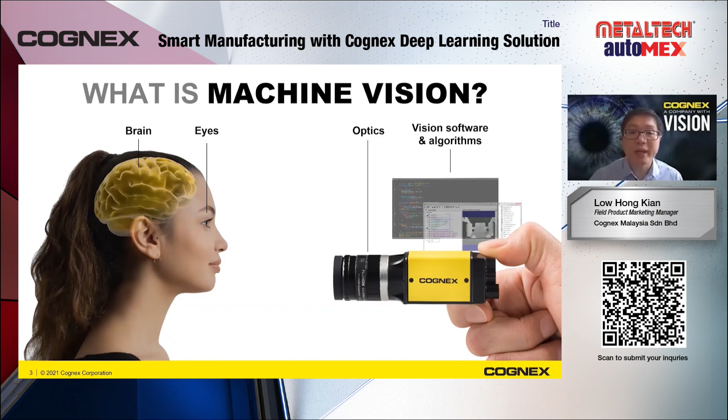So you have heard about machine vision. Let's talk a little bit about where those products are used. The answer is just about anywhere. Vision allows you to monitor and manage your production line to make sure it is done correctly. This helps you to reduce cost and error in your manufacturing process.

When we look at smart manufacturing, it is the 4th industry revolution. First revolution, we started to change from human energy to other power sources like water and steam. Second revolution, we changed to electric energy to increase the volume or yield in mass production. Third generation, we use robots, conveyors, and motors to improve the speed. We call this automation. These three revolutions focus more about human physical ability.

Smart manufacturing equals Industrial 4.0. So Industrial 4.0 focuses on connectivity and cognitive ability. We try to collect more data, but most importantly, we use the data.

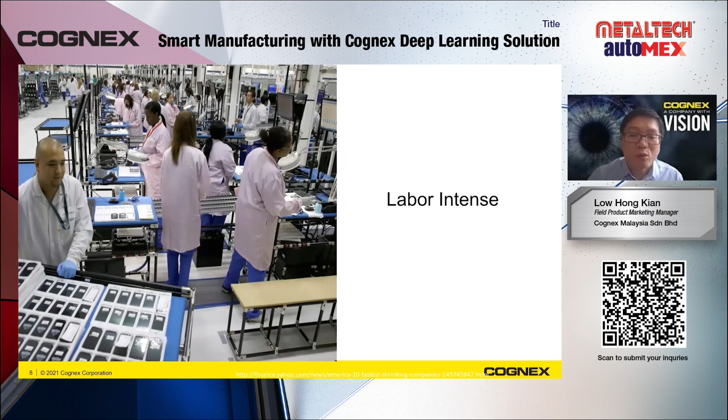And this is an example I heard. I think this is the best story to talk about the conversion. So let's hear what they say.

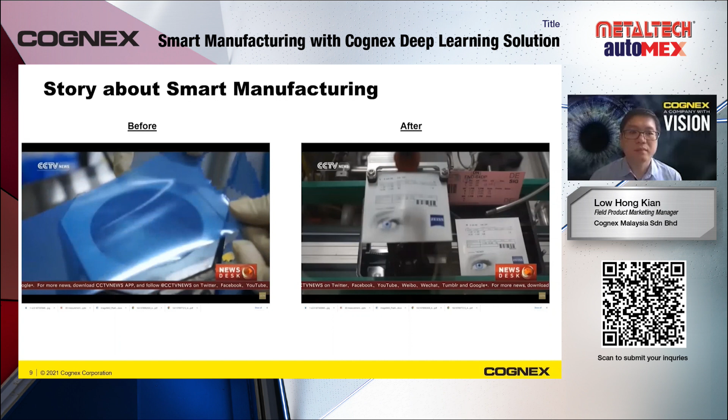This is a factory producing glass lenses for the German brand Carl Zeiss. 7 out of 10 lenses made here will go to Europe. 4 years ago, the manager discovered this Chinese plant had lost its biggest competitive edge, low cost of labor. In 2012, the Zeiss Group informed us that labor in China was twice as expensive as in Mexico and 4 times that in India. We were very surprised at this huge gap and started to think of how to improve productivity. Then Zeiss made the change.

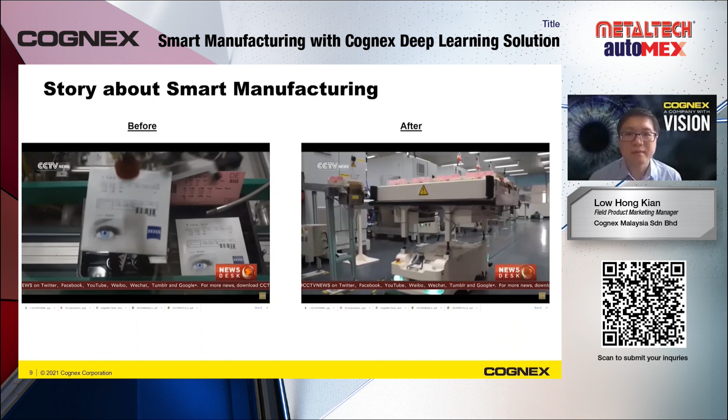Let's continue to hear what the result is. The factory introduced new automatic machines and techniques called freeform to replace humans in manufacturing. Now the machines can take care of most of the major steps, from pasting protection films, cutting shapes, polishing glass, and packaging.

Wow, this is an awesome result. I think Zeiss feels grateful because the change started earlier, and COVID-19 I don't think impacted them so much.

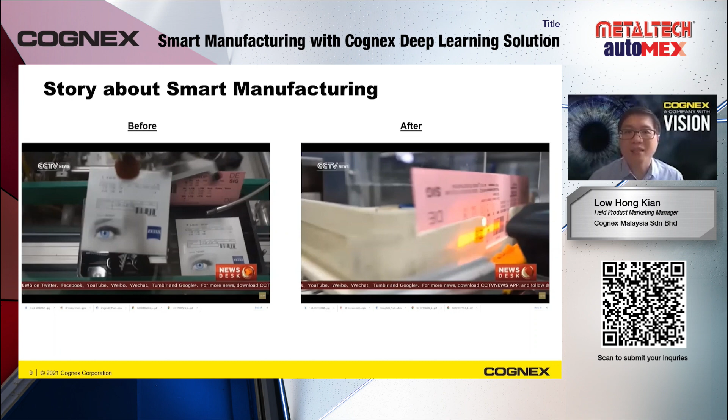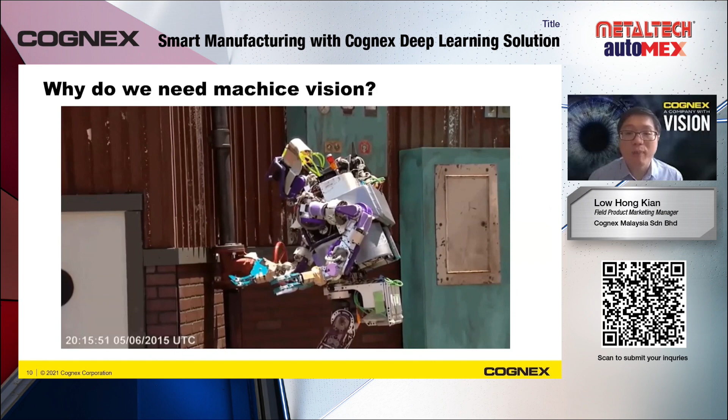So in automation, machine vision works the same as the human eye. In this video, you can find this robot trying to open the door, but it failed. Why? The motion is 100% right, but it did not do it at the right location, because the robot just doesn't have machine vision installed, so it cannot know.

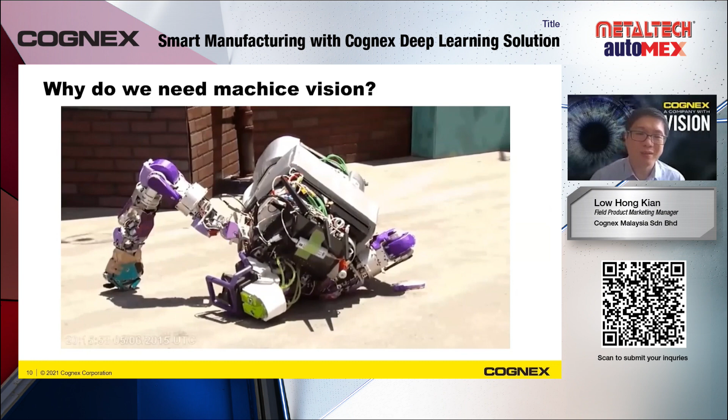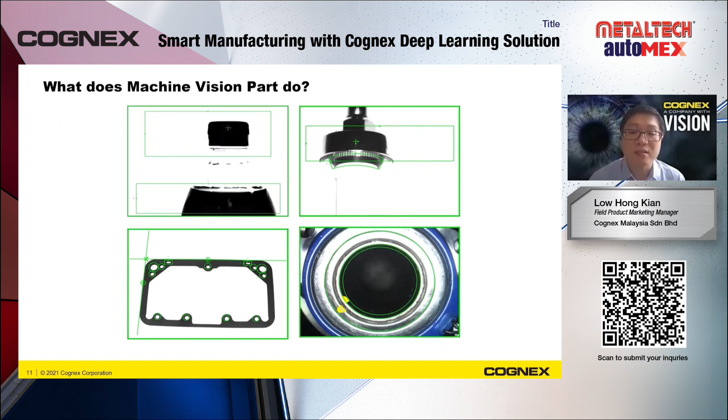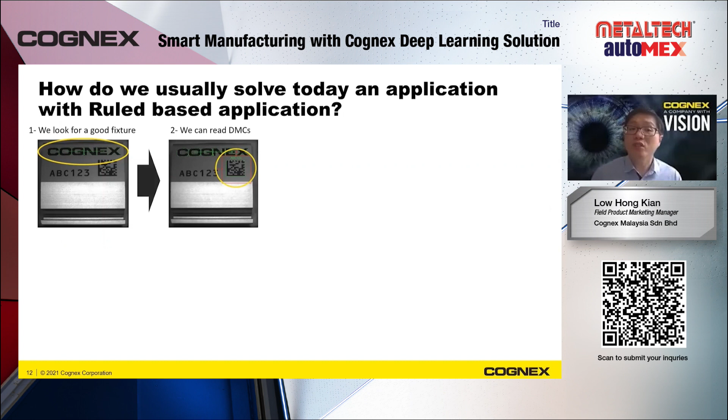So how do we solve the normal vision application? Usually we have to inspect a part by looking for the good fixture first. Second, apply vision tools like barcode reading tools to read the data matrix code, OCR tools to read the print or text, and finally use measurement tools to measure the width of the parts.

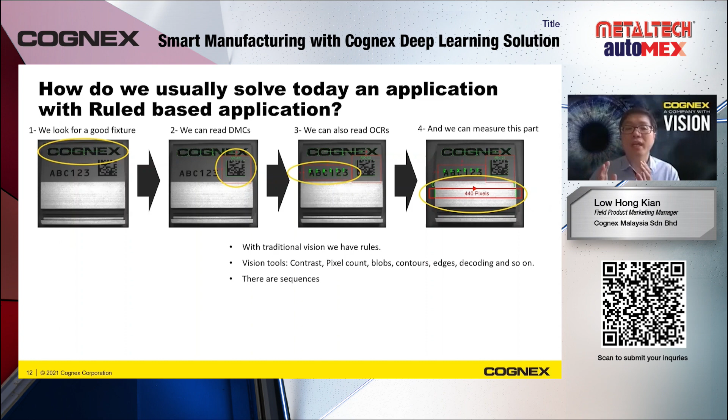You must understand, traditional tools are rule-based systems. We must use different kinds of vision tools combined together, like contrast tools, pixel count, blobs, contour, edge, decoding, and so on. You need to follow the sequence in this way.

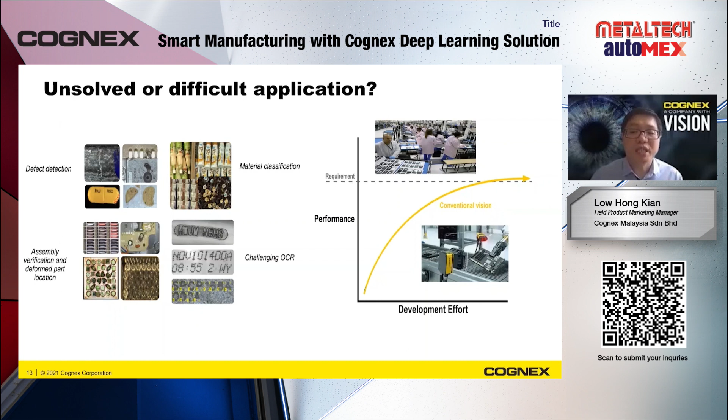Conventional vision systems have limitations solving four kinds of applications: defect detections, material classification, assembly check, and challenging OCR. Conventional vision systems started to face performance issues, so usually we still need human inspectors. That is the biggest challenge and barrier to going smart manufacturing.

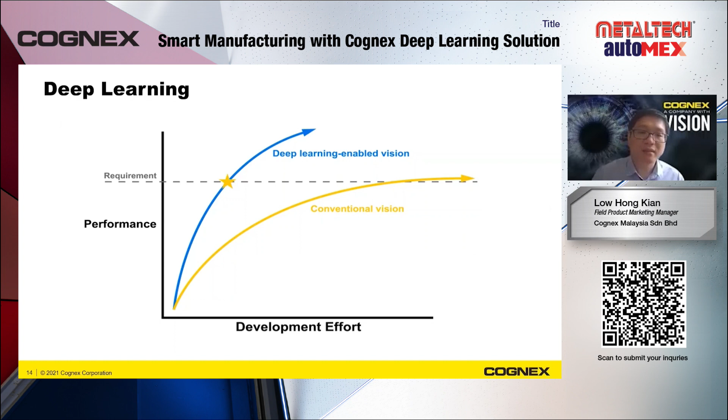And finally, we have some answer for you. Deep learning is the answer, helping us to cover more applications with better performance. But how does deep learning work?

This approach is different than traditional machine vision. This approach is mimicking the brain. We teach by example. So if I want to let deep learning recognize a house, at first I will just provide different images of houses. Deep learning, like a small little girl, will try to generalize and conceptualize. So this is how deep learning works, and it will know what is a house.

Deep learning is a core part of AI technologies, so it focuses more on cognitive ability like humans. With deep learning, we have to learn from a large amount of data and allow machine vision to adapt and continuously improve the program. So in short, it is human-like, it can do self-learning, and most importantly, it's very powerful.

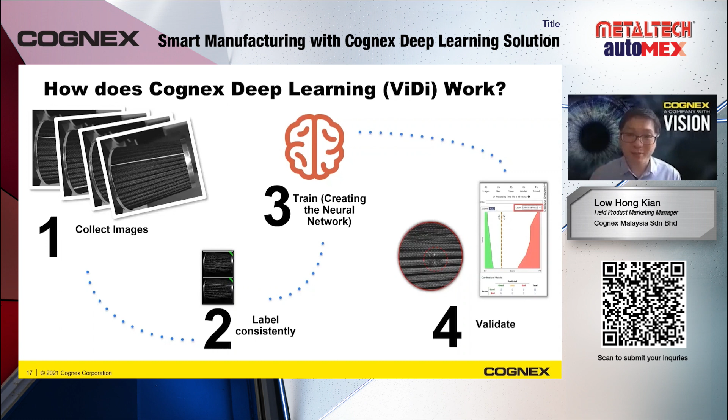So with 3.0, we can help convert some routine work. But coming to deep learning, we can provide cognitive abilities or predictability in the production flow. This aligns with the direction of Industry 4.0. So deep learning falls into this part.

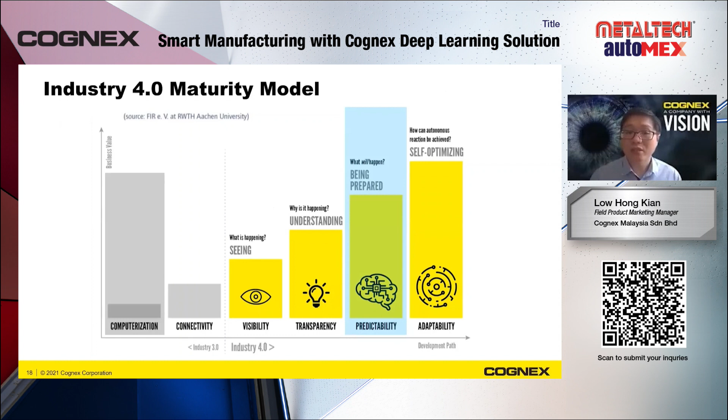We can check the structures, check the fuel filters and seatbelts. And coming to kitting, we can do spark plug tray or door handle checking, assembly check to make sure the right product is at the right position.

This is good for seat trim or covers, wire position, carpet and headliners. And we can do OCR to read the VIN plates or the texture on motor parts, to read the print on them, and to do welding inspection.

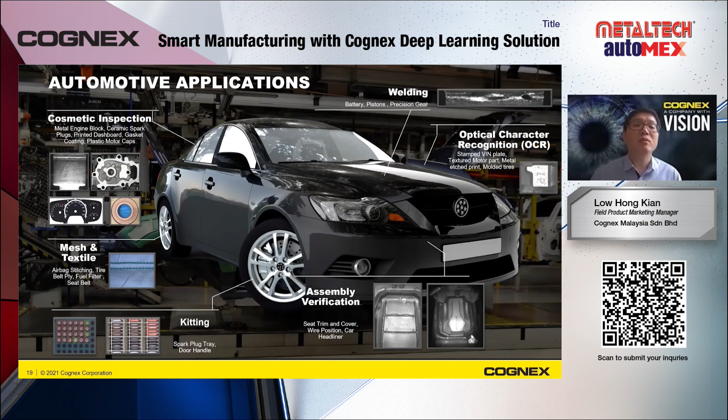So these are the common deep learning applications in automotive. Coming to electronics, normally we focus on those high-value products, so smartphones are the most common application we normally do.

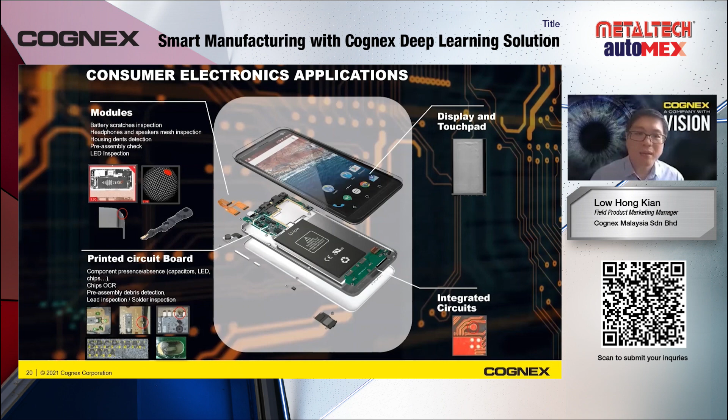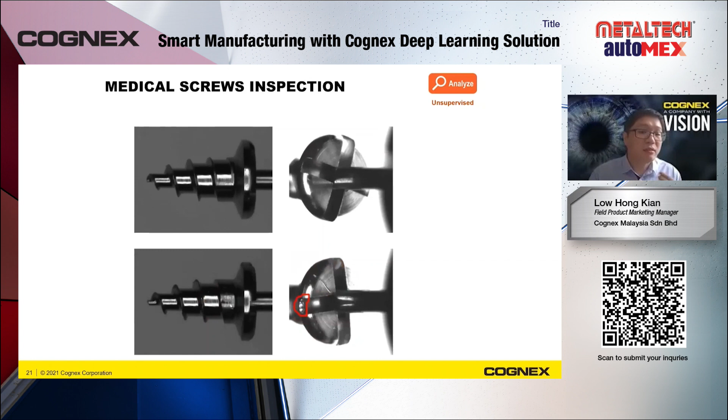Here's an example to give you more understanding. I want to share with you the first application: medical screw inspections. At the top side, there are good screws, and we need to train with some images—let's say I capture 100 to 200 images. Then when it comes to production, if you try to detect any anomaly on the samples, the bottom side shows it detects some dent or scratches on the screws.

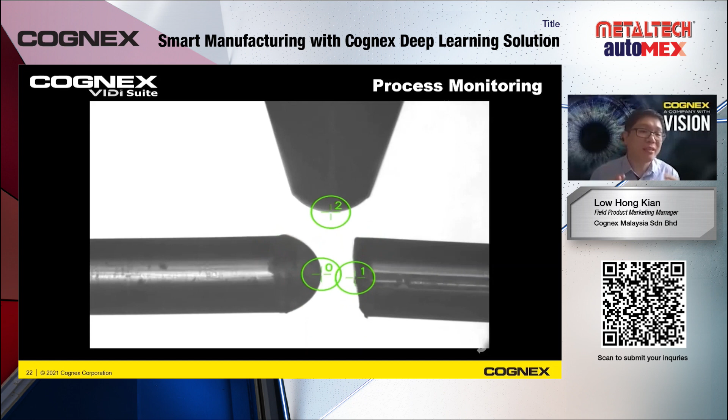The solder can never be consistent because it's a liquid, and only deep learning allows us to really detect this process, or check some application's ingredients. When we rotate or stir the mixtures, we can see good conditions versus problems, like when foreign material falls into the mixture. Using deep learning, it detects even a small piece of debris or foreign material and tells the system something is wrong.

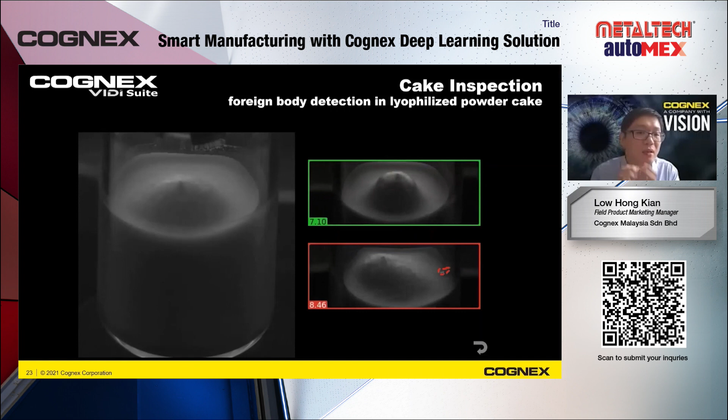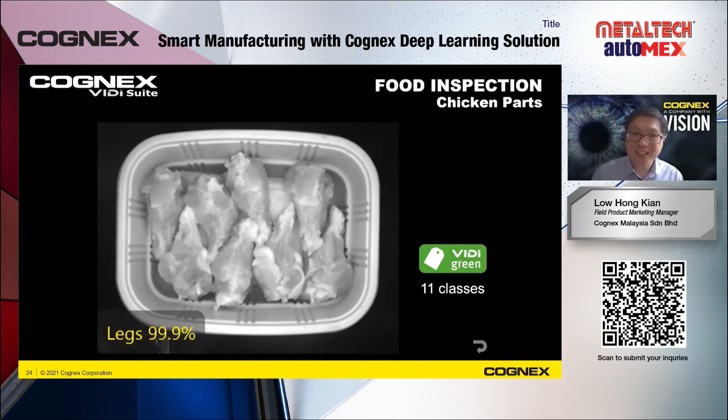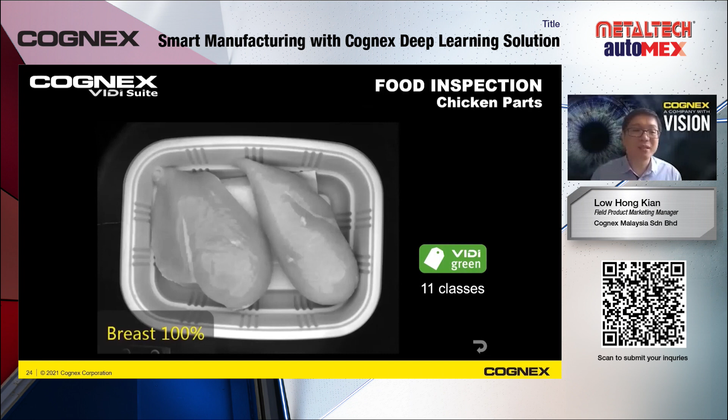Or we can do classification for food. This is a good example. We can train on different parts of chickens. The deep learning system can tell you this, even though pictures aren't identical. Most importantly, when we train another sample, the system can tell whether this is a chicken breast, chicken wing, or another type. This is interesting.

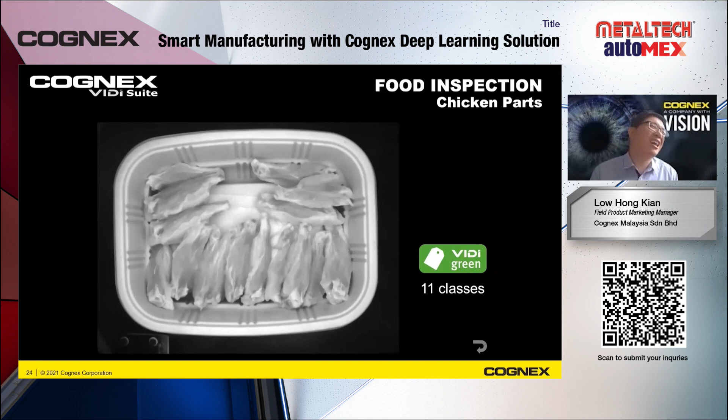To make this work, here are the basic deep learning architecture requirements. First, we need an algorithm. Second, we need GPUs for processing power. And last but not least, we need a lot of images to train it.

In deep learning, the general model we use is based on convolutional neural networks. It consists of thousands of classes, and each class is a layer of the neural network. To train it, we need to train 1,000 classes with a lot of images - it can be millions to make it stable.

So what makes Cognex Deep Learning unique? It's optimized for machine vision, specifically for real-world factory environments. We can train on a limited set of data, like 100 to 200 images, where others require millions. We can also train on a single PC with GPUs, while others might need a supercomputer or mainframe to make it work.

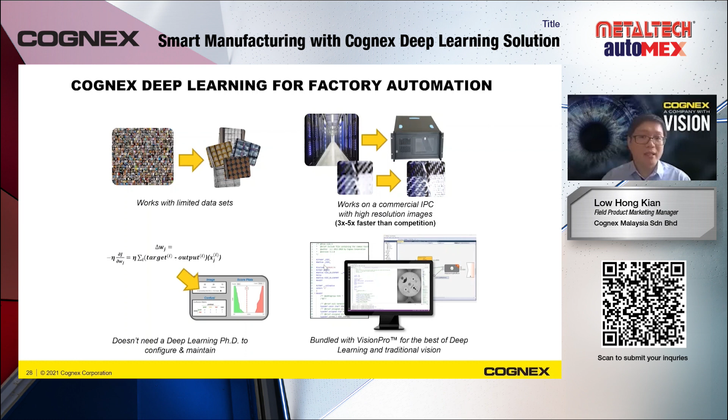With our tools, you don't need a PhD to configure and manage it because there are a lot of graphical interfaces. As long as you can use Microsoft Excel or Word, you can handle it without issues. It's also bundled with VisionPro traditional machine vision software to solve different kinds of applications. I'd say this is the most powerful software you can find in the market.

We try to put this kind of system in our smart cameras, so let's take a look. I have a video to introduce this camera - we call it the D900. The In-Sight D900 is a standalone vision system running In-Sight ViDi software, designed specifically to run deep learning applications.

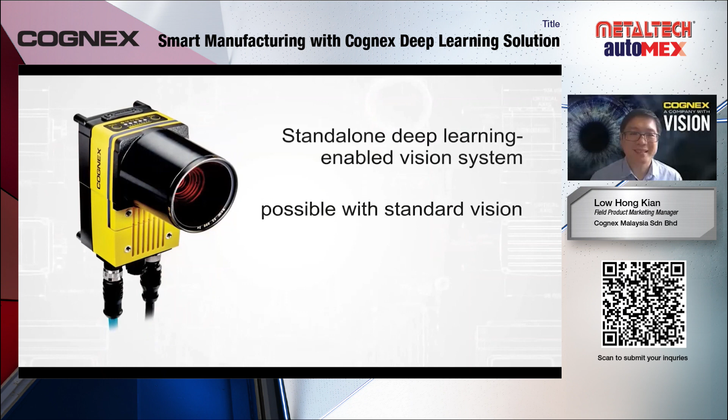This embedded solution easily solves applications too difficult to program with traditional rule-based machine vision tools, and provides reliable, fast, and consistent results not possible with human inspection.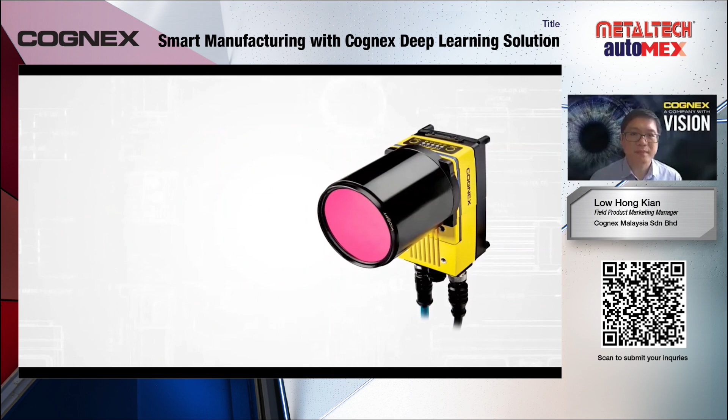Applications are deployed on the Insight D900 smart camera without the need for a PC. Using the familiar and easy-to-use Insight spreadsheet interface, it helps simplify application development and factory integration, making deep learning technology accessible to non-programmers.

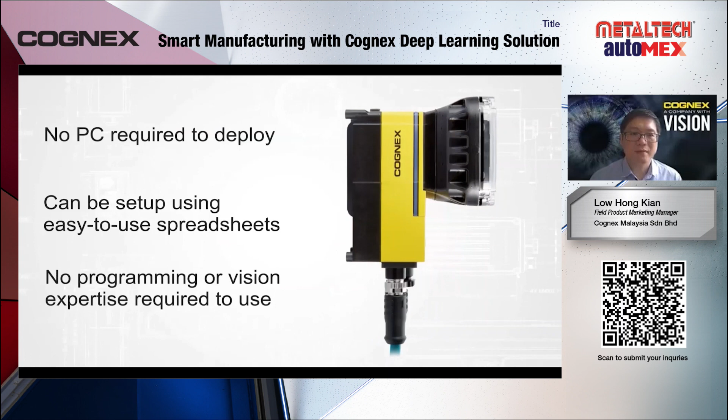The Insight D900 has both 2.3 and 5 megapixel options, allowing you to choose the right resolution for your application. Advanced image processing with HDR+ creates a more uniform image on a single capture, ensuring every detail is visible, even under challenging lighting conditions.

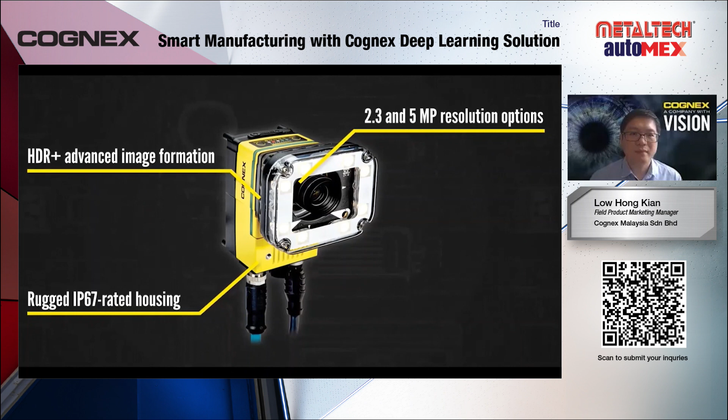The Insight D900 is rugged, with an IP67 rated housing, able to withstand even the harshest factory environments. Field-changeable lighting and optics provide users with ultimate flexibility to customize the system for their application.

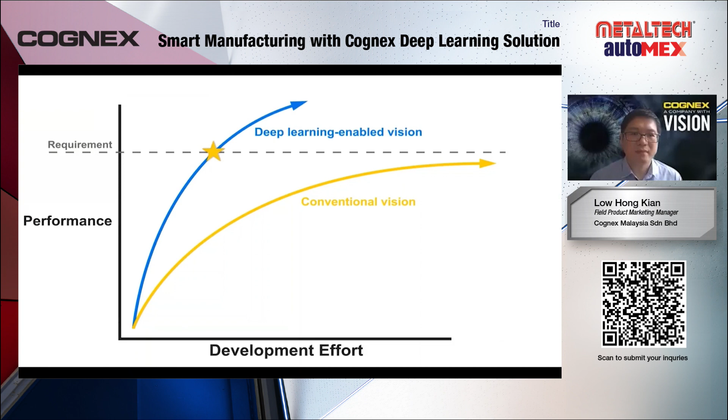Example-based deep learning allows users to automate inspections not feasible with standard rule-based machine vision. Applications like defect detection can be programmed using only good images, drastically reducing the setup time needed to get the system up and running. And because the training models use multiple images, ViDi can handle variations in the targets, as well as changes in lighting and camera perspective.

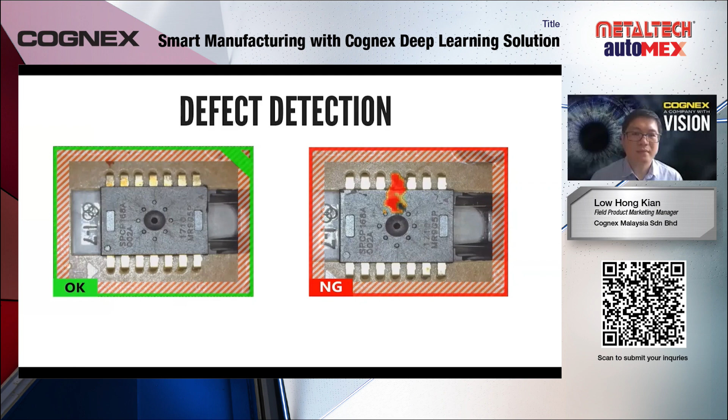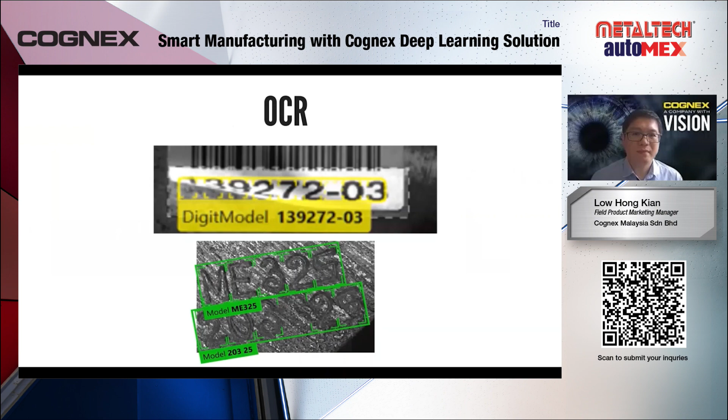OCR, especially on hard-to-read and obstructed codes, can be easily done with deep learning. Insight ViDi is preloaded with a font library right out of the box, and can be further refined on the factory floor.

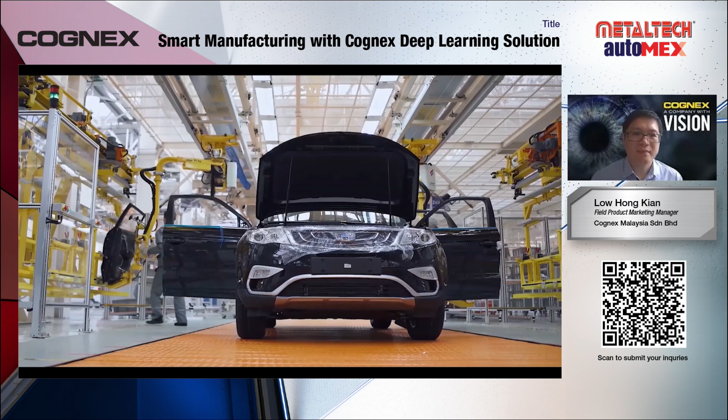Manual inspection was once the only practical method for assembly verification. Parts can have too much variation, and frequent production line changes make it difficult to reprogram a vision system quickly.

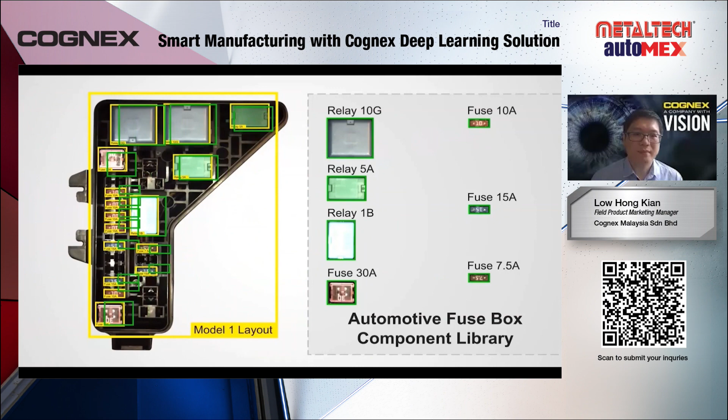But because ViDi's neural network uses multiple images to create a working model for each component, it can handle part variation with ease. Plus, operators can use ViDi to create a component library and use that to create custom layouts right on the factory floor, making new line configurations quick and easy to do.

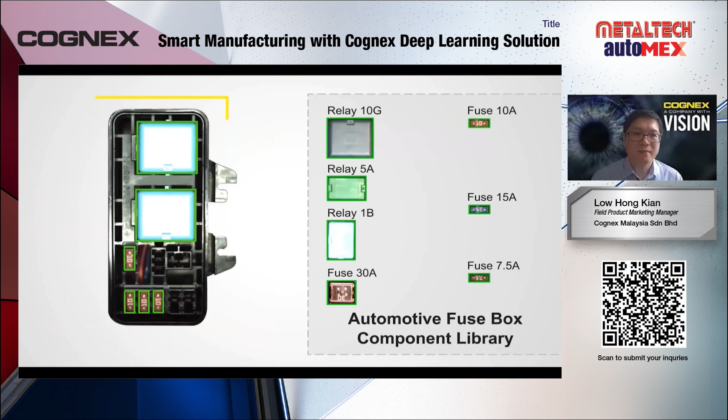Deep learning is changing what's possible in factory automation. The Cognex In-Sight D900 is making deep learning-enabled machine vision more accessible and easier to implement than ever before, enabling users to further improve quality, efficiency, and throughput in their facilities.

Wow, this is a very good introduction to our deep learning system. I believe I have some experience with customers coming to deep learning applications. They told me they always need to spend a lot of time to source the camera to get the system running - easily 1 to 2 years.

In Cognex, we would like to make this process faster. That's why I would say deep learning with smart cameras - this should be the right answer. Today I'm not in Metaltech, so I cannot show the live demo, so I would like to share 2 videos.

So the first one is about the plate and tube identifications. In this application, we try to use deep learning to recognize whether any tubes are empty. The blue one is good, then the gray one shows there's no cap.

Then we try to change to another one, which is in a different color. We can detect those empty tubes without changing the job file. This is all in one.

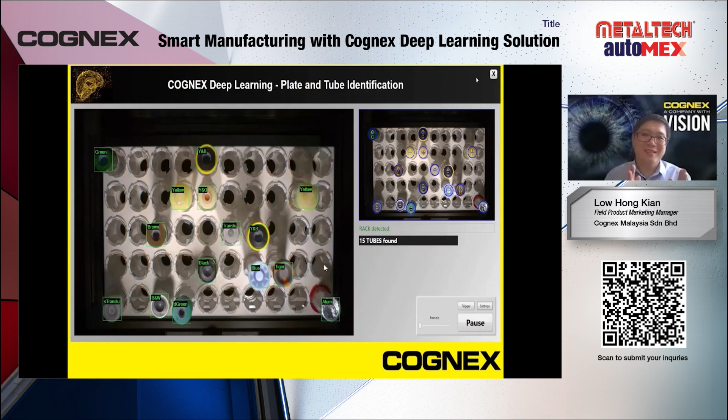And the next one is a live demo for the challenging OCR applications. You can see how my colleague demos this - narrowing down the ROI for just the characters.

And with the transparency, I can start doing interesting things like bending it and changing the scaling, changing the shear and the aspect ratio of the characters to prove that the ViDi read tool is very robust against those changes.

And just to prove that that's not black magic, what I can do is cover up some of these characters to show what happens when a tool can't read characters and they're totally just not visible to the camera.

And for the subtle part, we can start messing with the background, right? So let me just increase my exposure real quick. We'll want to start the demo around 0.4 probably.

And I can introduce this carbon fiber business card and show that as the background changes pretty drastically, we still get good read performance. I'm just going to throw a different transparency into there to show a different one.

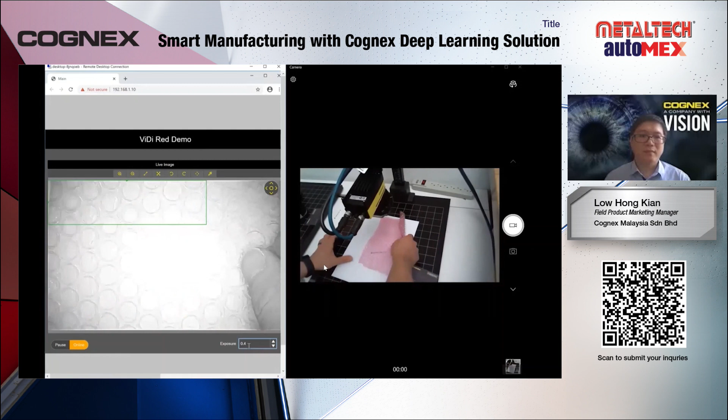So that's pretty neat. I can do some other interesting things like throw in some bubble wrap, make the background kind of challenging. Let's do that.

Actually, let me just decrease the exposure now and make that more interesting. So, in fact, I can read through the bubble wrap, so you can see how well the ViDi read tool performs when there's a ton of variation on the characters.

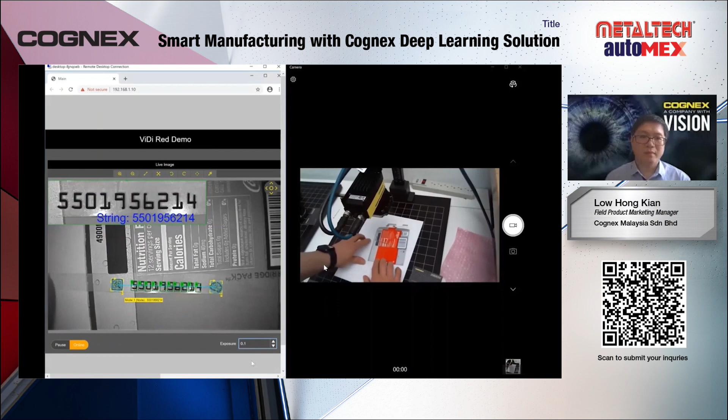Some other things I can do, introduce a really varied background like this one. And again, the ViDi read tool can perform pretty well on that.

So then if the customer is interested in seeing how that was set up, we can go into ViDi Suite and show them another interesting detail.

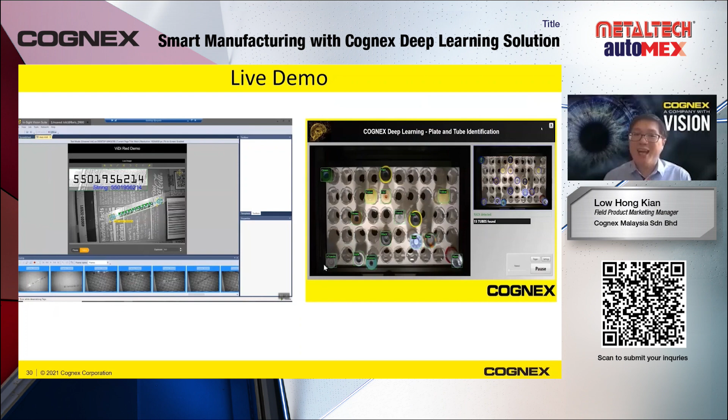Yeah, that's all for my live demo. From here, you can find D900 is a killer product for this kind of application, challenging OCR or presence checks. After the live demo, I would like to share a 10 minute video about the defects detection tutorial. Then you will know how to train a system.

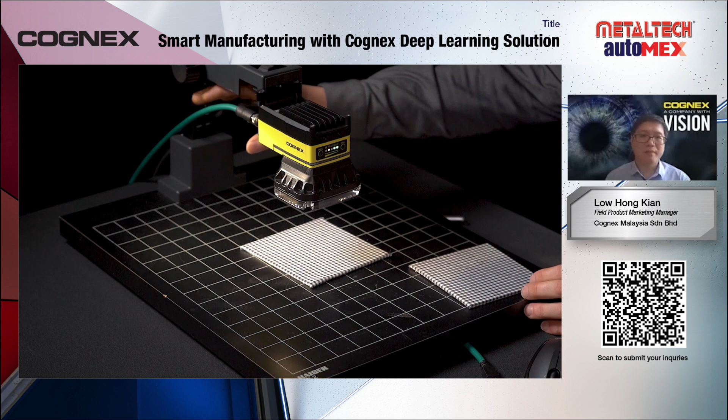Today, I'm going to take you through setting up the ViDi Detect tool. In terms of my setup here, I have the D900 and it's hooked up to 24 volt power and the Ethernet cable is hooked right up to my computer. My computer is GPU enabled, which allows me to train the deep learning tools. And the other thing I have here is a USB dongle, which is what has our security licenses on it.

In the application we're going to tackle today, we have a textile tile. This is what the good textile tile looks like, and here's what some defects look like. The objective of the application is to use the ViDi Detect tool to pick up these defects. So with that, I'm just going to jump right into it.

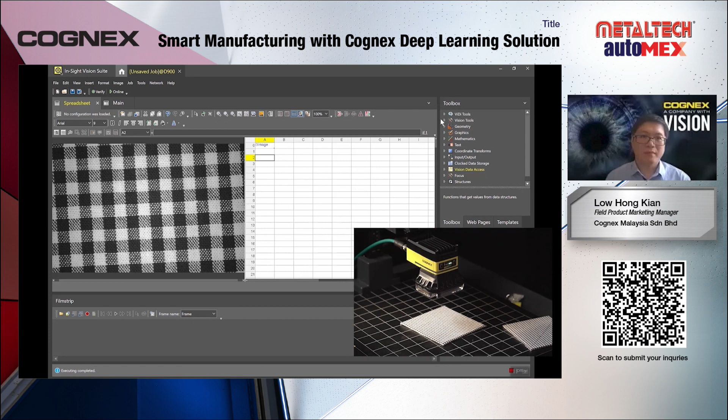The first thing I'm going to do is put my good part under the camera, and this camera's already been focused and all the image formation is set up. So all I have to do is give it a couple triggers. We can put it in a live mode and show what the textile looks like.

But the first thing I want to do is collect images of both my good and bad parts. So I'm going to use the film strip down here. I'm going to click this record button, and with that, every time I trigger, I'll get a new image in my film strip. I'm just going to go through that process for maybe 10 or 20 images of good parts.

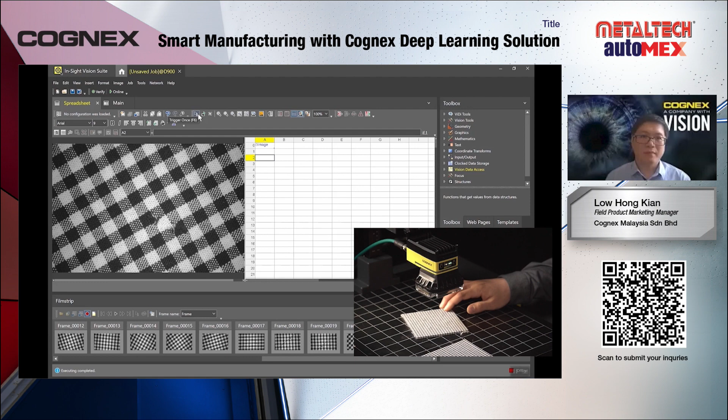You'll notice that I'm rotating with every image, because in this mat application, basically the textile pattern can appear in any orientation. Once I have 15 or 20 images of that, I'll also want to capture some images of my defects. Here you can see what a defect looks like. I'll do the same thing here, capturing a couple different defect types, including some of the small ones. Now I have a good representation of what good and bad look like in my application.

The next thing I'll want to do in this film strip is just to append some descriptors to my images. So I'm going to select this first one, scroll all the way to my last good image, which is right here, and use the Shift key and click, and that'll select those images.

If I right click, I can rename selected frames, and I can prepend a string. So I'm going to call these good, because this is all my good images, and you can see that that file name was added. I'll do the same for my bads - select all my bad images, right click, rename selected frames, and prepend the word bad here. This will be useful here in a second when we get to the Vidi tool.

So now I'm good with my images. The next thing I want to do is drop in a Vidi tool into the spreadsheet. That's as easy as going over to the toolbox here, selecting Vidi detect, dragging it over to an empty cell in the spreadsheet. And just like that, we can open up the Vidi editor.

The first thing I want to do before that, though, is to set the region. Just like all the other tools in In-Sight Explorer, the Vidi detect tool has a property sheet where you can change some settings, and I'll set my region. This is my inspection region - I'll set it to be most of the image, focusing on the middle. Once I have that set, I can hit that green checkbox, and now I'm ready to go into the Vidi editor.

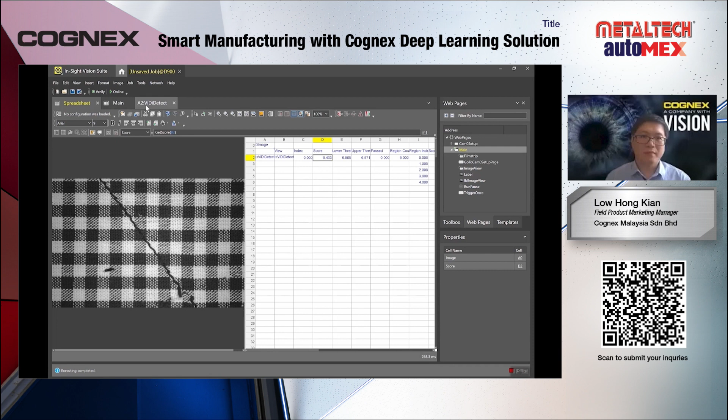Back in the spreadsheet, let's say I wanted to publish the score - this is my ViDi score for the probability or confidence of there being a defect in the image. If I right click and publish, I'll get a score here, and it'll also publish in my tags. Now if I go back to my main web page, let's pull up the tag browser. I go to view tags, and there's my tag browser.

I can search this for score, and it's going to be in here under my inspection task in the spreadsheet, score. All I have to do now is drag that onto my web HMI, and now I can get data basically published to my web HMI really easily.

Let's do that with one more item. Let's say I want to enable the user to change the graphics of the ViDi tool. I can go into this property sheet here, grab this whole show property, and put it in my spreadsheet. Then I can right click and publish that, and it's going to be by default called show. I go back to my web HMI, and now I can search my tags for show.

In a similar way, I drag and drop it into wherever I want it on my web HMI. Let's put it there for now. The last thing I want to do - this web HMI comes with a live film strip, and I need to assign a watch cell to that. That's pretty simple. I'll go over to my pass getter from the ViDi tool, right click on that, and select watch cell. I'm going to set that as my watch cell.

With that, I'm going to go ahead and put my camera online and see how it's doing. Now my camera's online. You can see that score updating. Right now I don't have any graphics shown. I can pause this film strip and review the images.

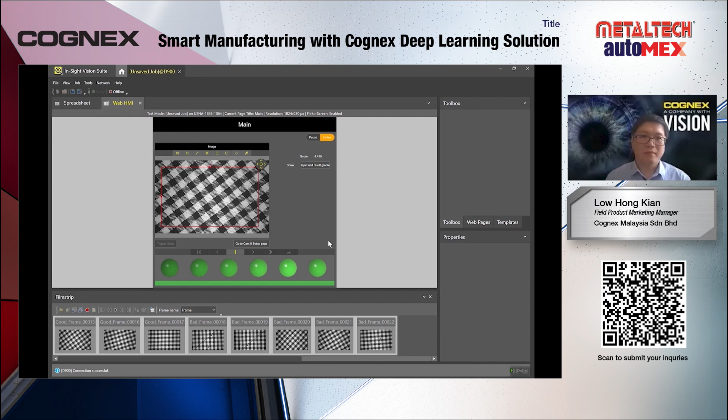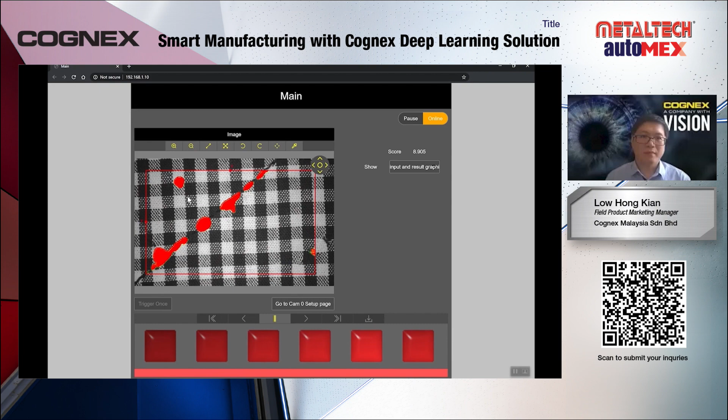The other thing I can do, I can pull this up. Since this is a web HMI, I can pull it up in a web browser. To do that, I can just go back to the shell of In-Sight Vision Suite and click this Open HMI button. And what this is going to do is pull up my default browser automatically with the right IP address, and we'll see the same web HMI that we set up before. So here's this, and just for good measure, we can throw this in here and show how it's highlighting defects.

Okay, so just to recap on our demonstration of the Vidi Detect tool, the workflow steps that we did: First, we collected images, and then we imported those into the Vidi editor where we labeled them for Vidi so that Vidi knows what's good and bad. We set some tool parameters, and we trained the tool and reviewed the results to make sure that Vidi can separate the good from the bad. Once we knew that our Vidi tool was working, we went back into the spreadsheet and used the insert getters function to get all the results data back into the spreadsheet.

Once that data is there, we can do some things in the web HMI with that data, like control the film strip or publish the score. From here, a user could spend more time with the web HMI and customize it to whatever the need is in the application. Another thing that you could consider doing is setting up the communications, whether that's to the PLC or to discrete I/O. Thanks for watching.

In my last slide, I would like to share with you what Cognex can help with in smart factories. So I tried to put one example in F&B, so hopefully everybody will like it.

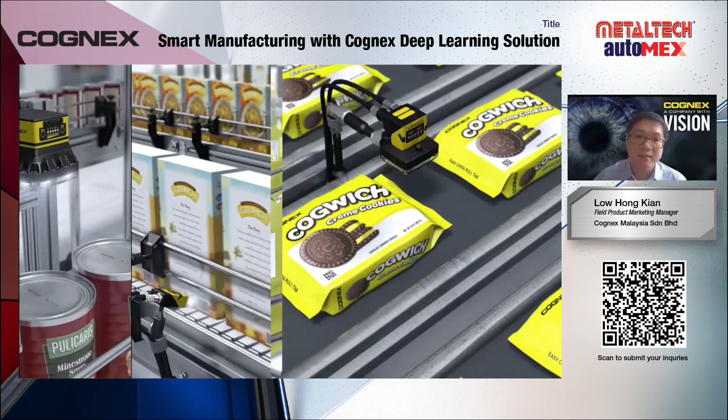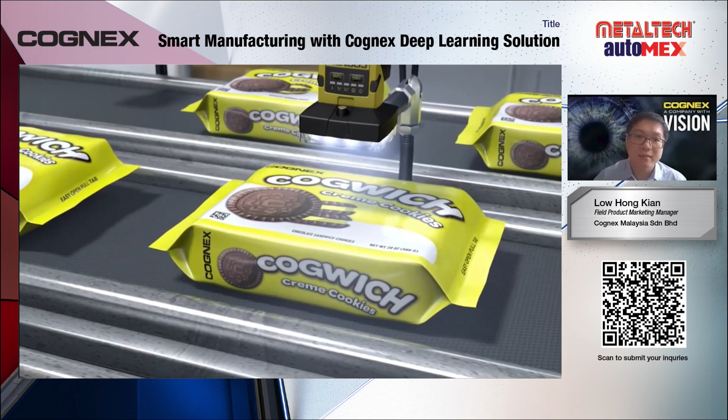Modern food and beverage manufacturers have some complex recipes to follow. Along with flour, cocoa, and sugar, manufacturers also need to mix in key ingredients like traceability, quality control, productivity, and regulatory compliance. Cognex vision and barcode reading technologies help manufacturers around the world improve product quality and their bottom line by tracking products through the supply chain, eliminating defects, and enabling automation.

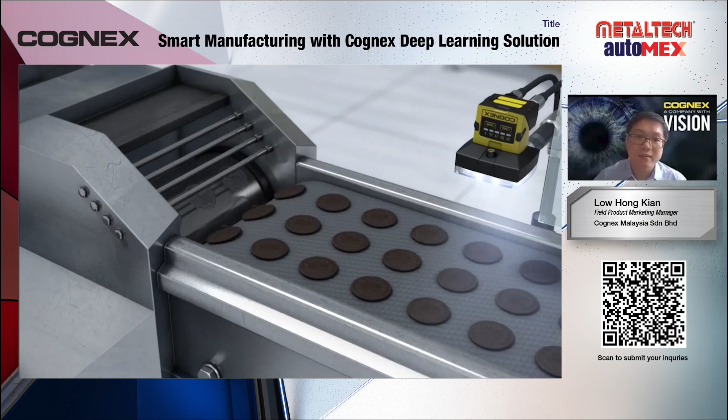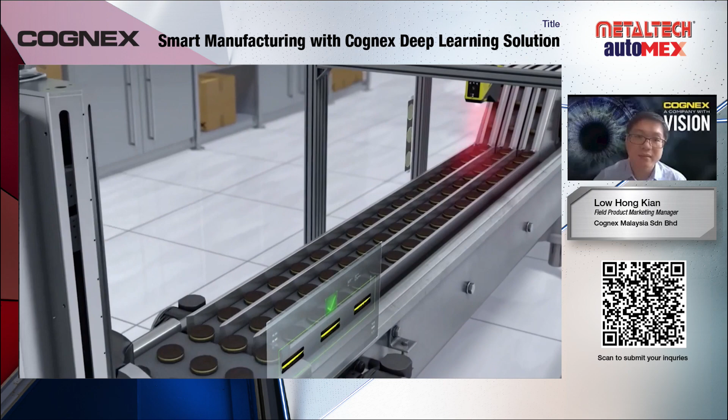Visual inspection of raw materials ensures product quality. Catching defects as soon as they happen improves productivity and reduces waste. Cognex Vision is used to verify quality in real time and trigger the system to reject defective products. The Cognex DS1000 3D displacement sensors find defects that are hard to see with 2D systems, measuring product volume, inspecting logo imprint, and checking for damage.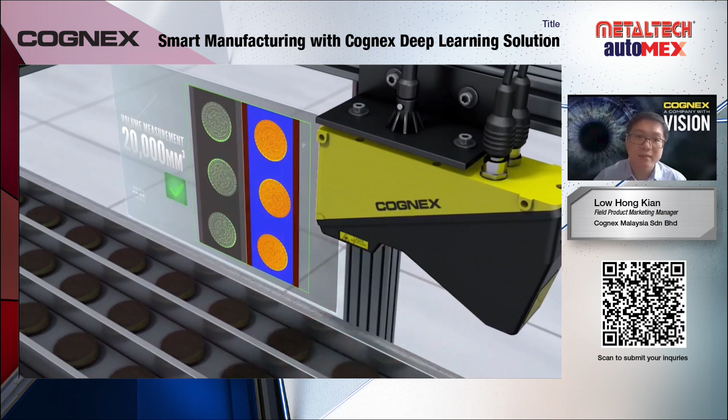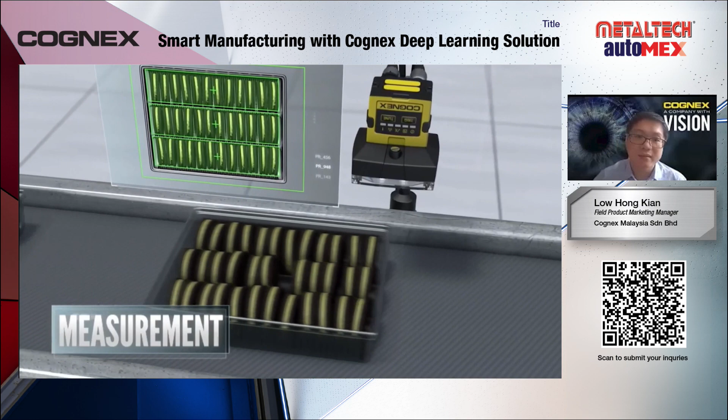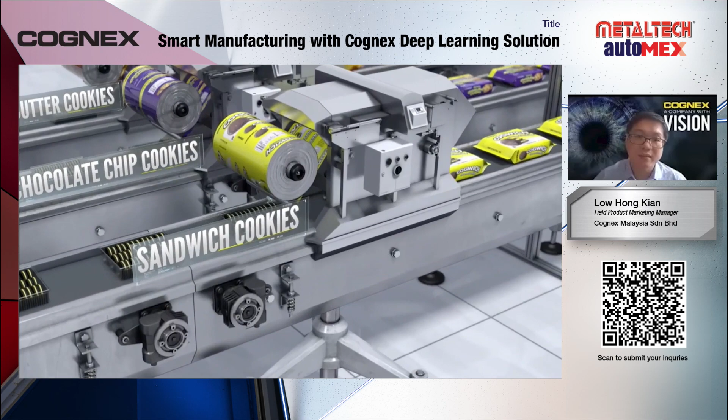The Insight 2000 looks for brightness, contrast, color, pixel count, patterns, and measurement. Here it's checking for gaps in the tray to verify that it's filled properly. Ensuring products end up in the correct packaging is crucial for allergen management, consumer safety, and brand integrity. It is also key to reducing costly product recalls.

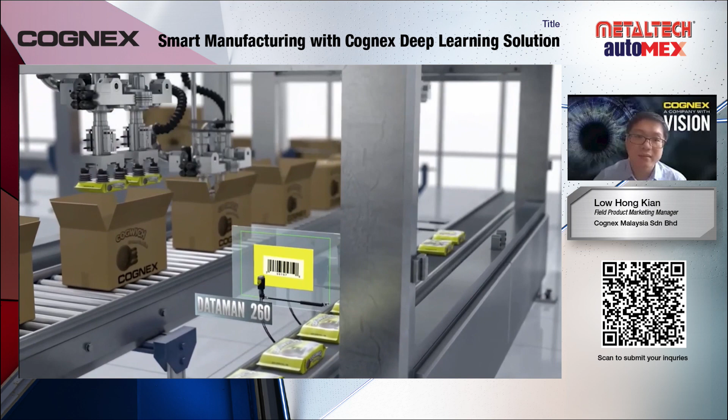Insight Vision Systems offer a wide range of industry-leading vision tools that are able to keep pace with the fastest packaging lines. The Insight 7000 series inspects the integrity of the package, verifies the date and lot code specified by the PLC, and reads 1D and 2D codes. Dataman readers optimize traceability, which helps prevent counterfeiting and minimize losses. If a recall ever occurs, locating a specific batch is easy.

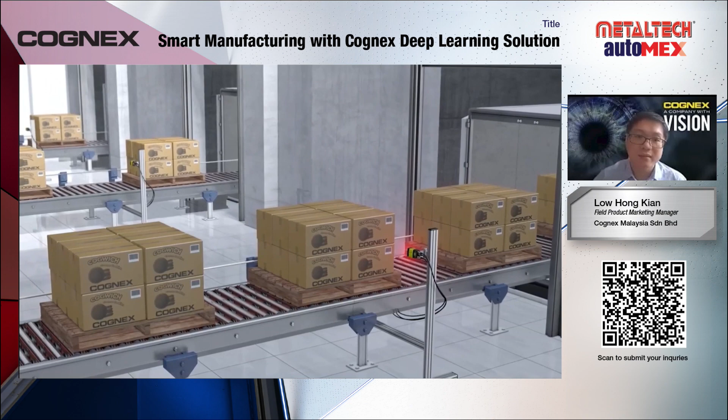Food and beverage manufacturers around the world rely on industry-leading Cognex Vision technology to optimize product quality and productivity, control traceability, and drive down manufacturing costs. For more information on game-changing Cognex solutions for the food and beverage industry, contact your local Cognex representative or visit cognex.com.